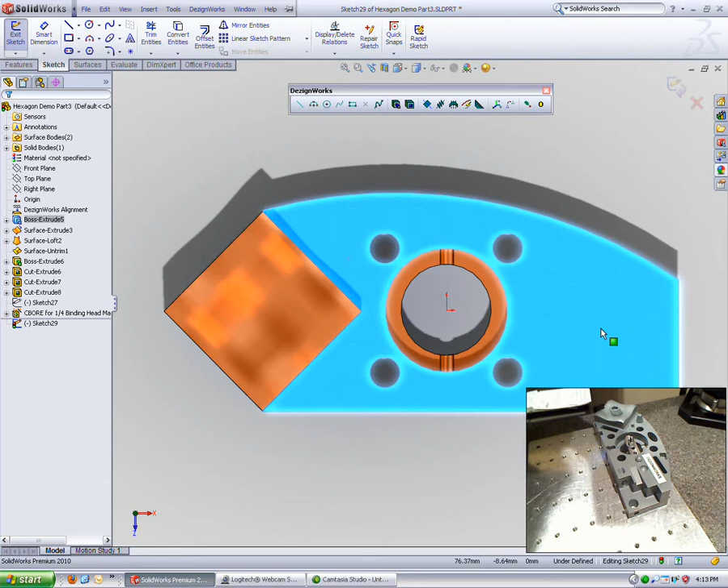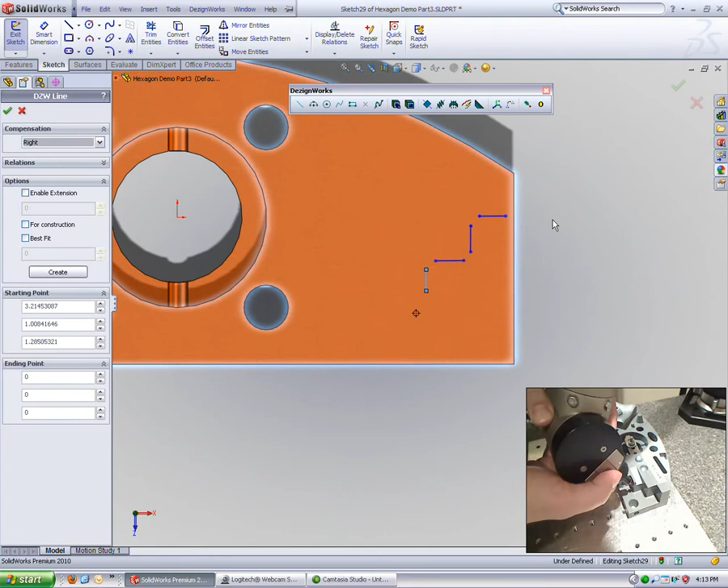The next set of geometry we're going to create is the steps along the right hand side. This is another example of doing 2D sketching with lines using the probe as input. The nice thing is we're doing automatic compensation, capturing a bunch of edges very quickly using the probe.

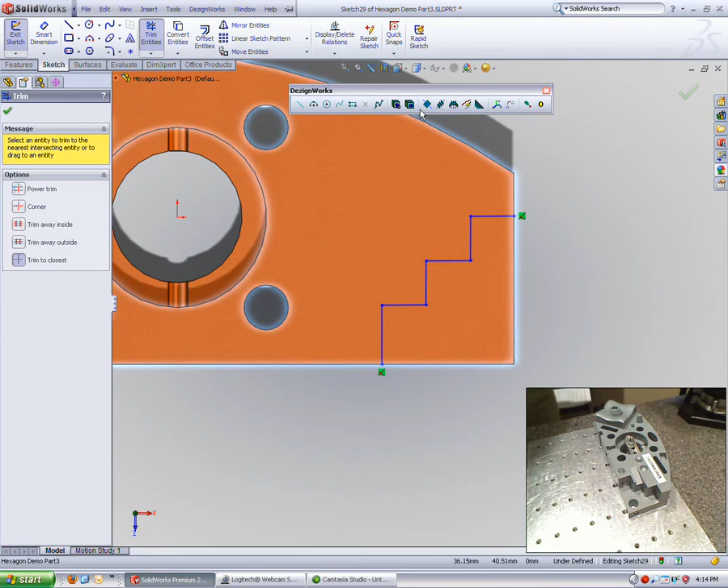Then we'll step back and use SolidWorks tools to trim up that geometry to create closed profiles. What's nice about this environment is you're always inside SolidWorks, because Dezignworks is a fully integrated gold solution product. We never have to leave the environment or do anything outside of SolidWorks. Again showing the level of integration, we're doing a cut using the contour select, which is right inside the Dezignworks cut tool off the Dezignworks toolbar.

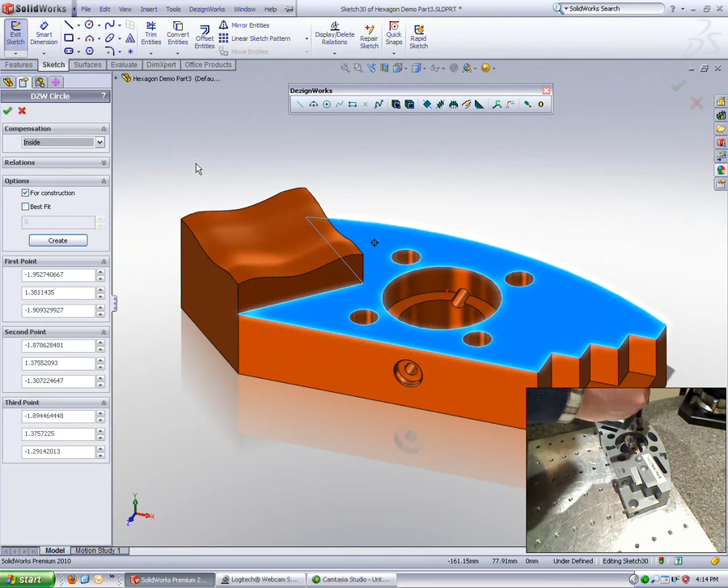Just like the locked surface where we capture a cross-section of information, here we're going to do a locked plane, used in a way that's a bit unique to this application. First we're going to get a location for the cone sticking up off the top of the surface, using construction since we just need the center point of that circle. We'll offset a plane up to that center point, and that plane becomes our locked plane that we'll take a cross-section through.

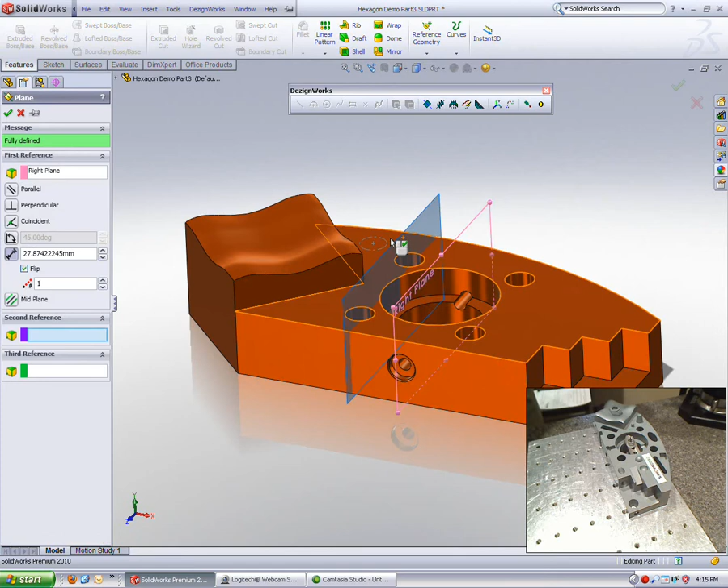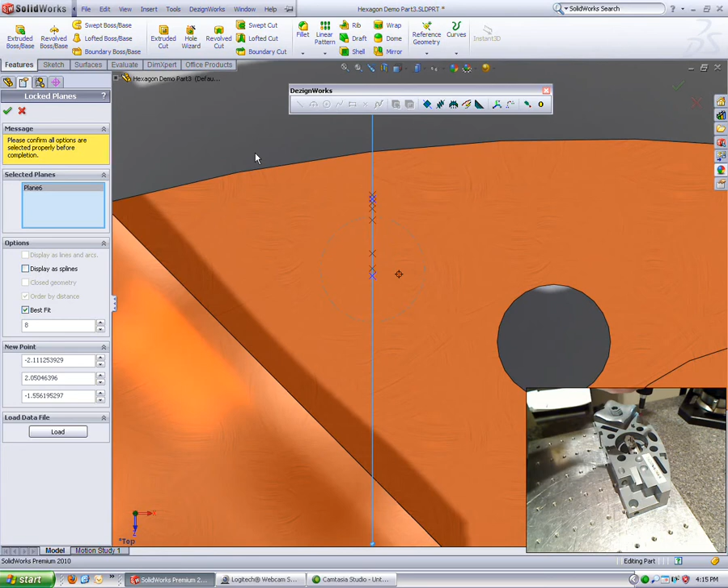Here we're using a standard SolidWorks function, the offset plane tool, picking a point for that plane to offset to. Now we'll pick our locked plane and change our orientation so you can actually see the probe move through that plane, and every time it does you'll see the point get picked up. We don't have the sound on the arm for this video, but normally every time the probe passes the plane you'd get an audible indication as well, so you know you've gone through the plane.

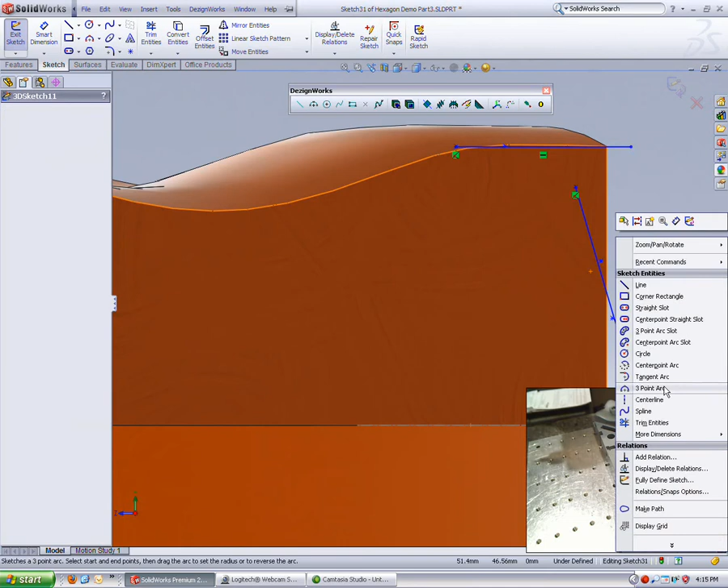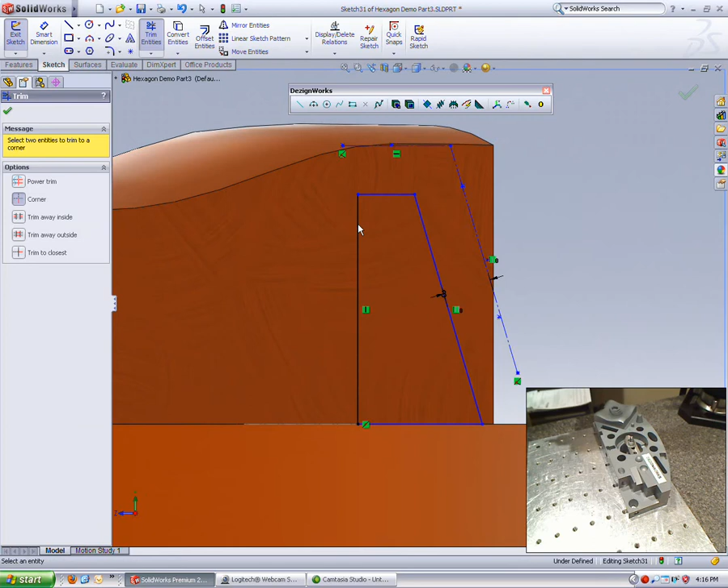Inside Dezignworks, sometimes you don't automatically comp, so here we're doing our comp for ourselves by offsetting this geometry right inside our sketch. We've offset half the diameter of our probe, again just drawing with standard SolidWorks tools. What we'll be able to do with this once we get the profile created is use our revolve tool and finish up this geometry fairly quickly.

The nice thing about this is we have a perfectly revolved shape that was based on the information we captured from our part.

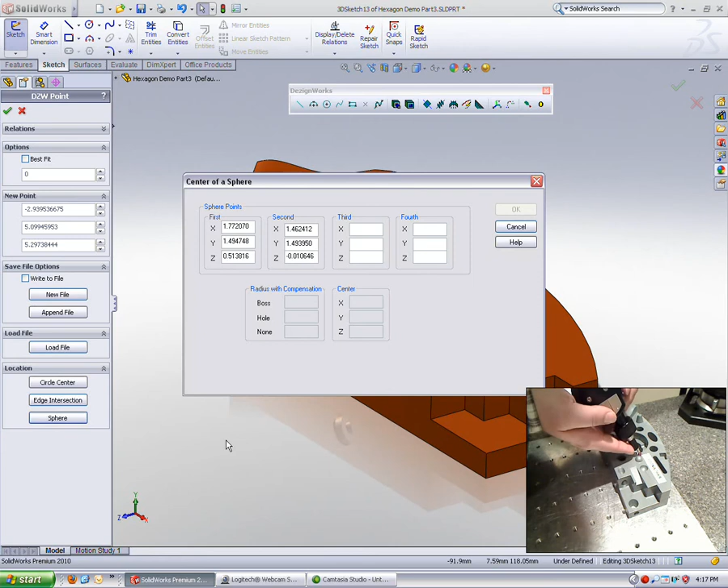A new tool inside Dezignworks 10 is the ability to get a center point of a sphere. Here we're going to do a 3D sketch with a point and use a new sphere command. We could also do circle center and edge intersection. So we're going to go around this half sphere and pick up a set of 4 points, which will give us the center point of the sphere that we'll use again in a plane offset to do another lock plane example.

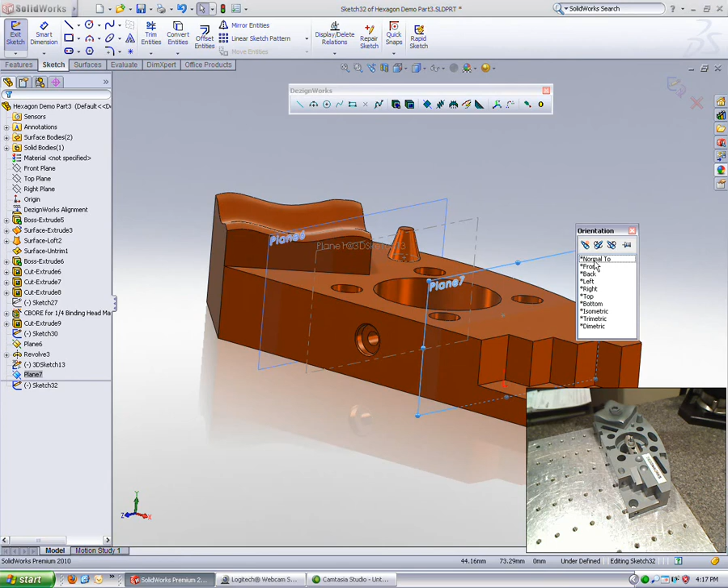Now the lock plane is used quite often to do complex surfaces and get multiple surface cross sections that we can use as loft sections to create complex geometry. You can see that in some of the other example parts on the Dezignworks YouTube channel as well.

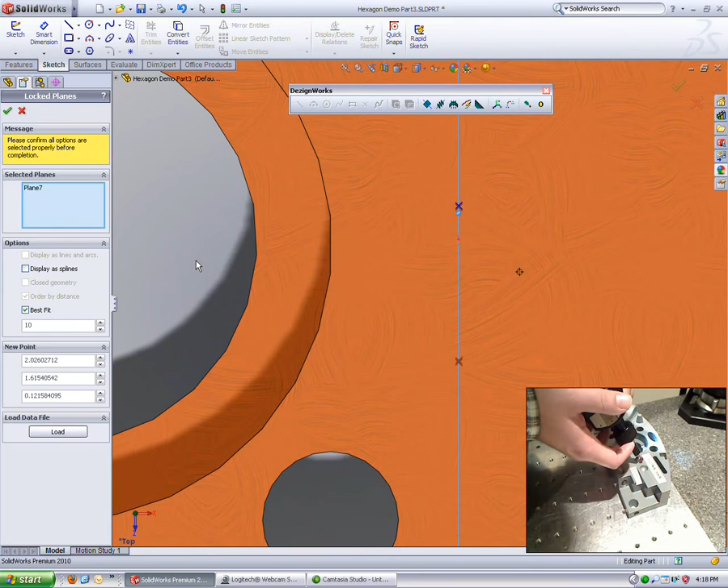Now, this particular sphere we know is a half circle, so we're just going to take some points in our lock plane that are along the bottom edges and also across the top center, because we know we're going to draw a circle or an arc, actually a center point arc, to give us our cross section that we'll again use to revolve.

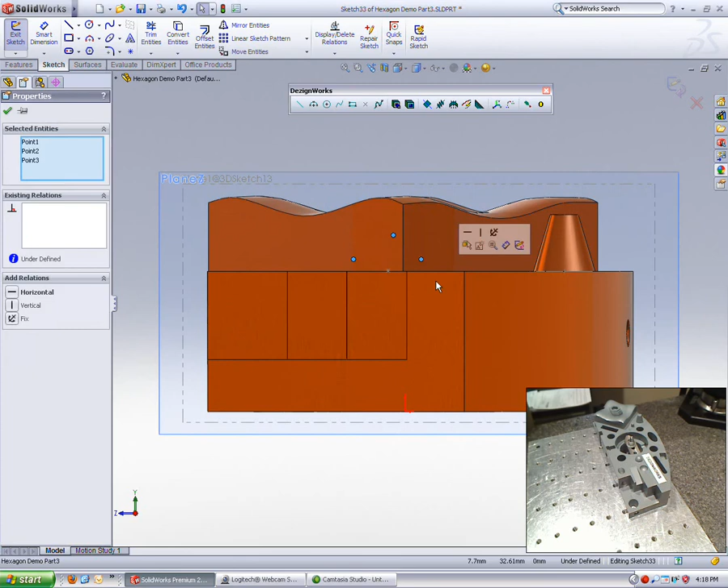Again, the benefit here is everything's native SolidWorks data, so we know these points can be referenced to create relationships when we build this arc geometry, and we can edit the sketch that was just created by that lock plane to put in SolidWorks geometry.

Again, we may want to offset the arcs that are going to be created so we get an accurate offset from our ball size. So here we're going to use a standard center point arc and create some relationships to those points, then go ahead and close off that profile once we offset the geometry the size of the probe.

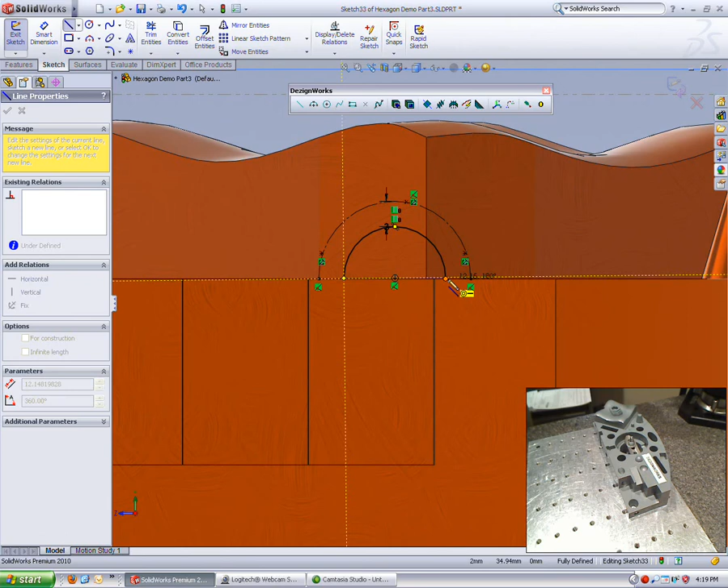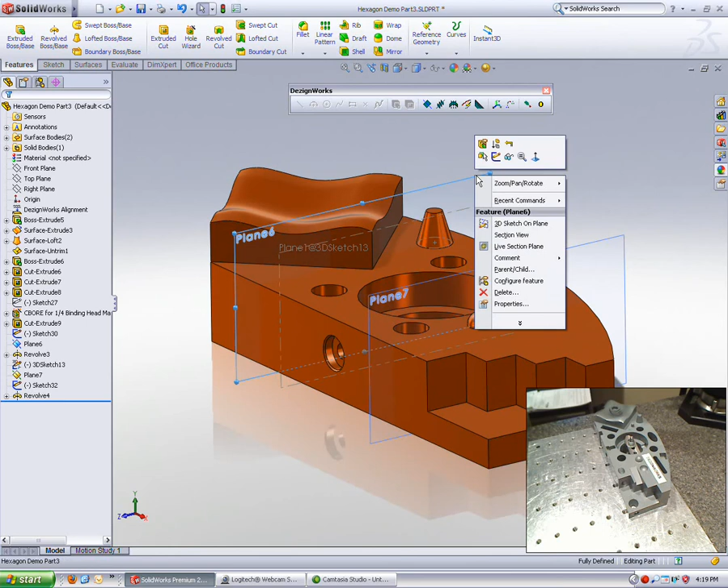In Dezignworks, you're always working in conjunction with your SolidWorks. So the knowledge you have of your SolidWorks tools is going to make the use of Dezignworks very easy for you as you go through and create your geometry, because you're modeling using standard SolidWorks tools and just taking the input from the arm, using that input along with Dezignworks tools to get the geometry you need.

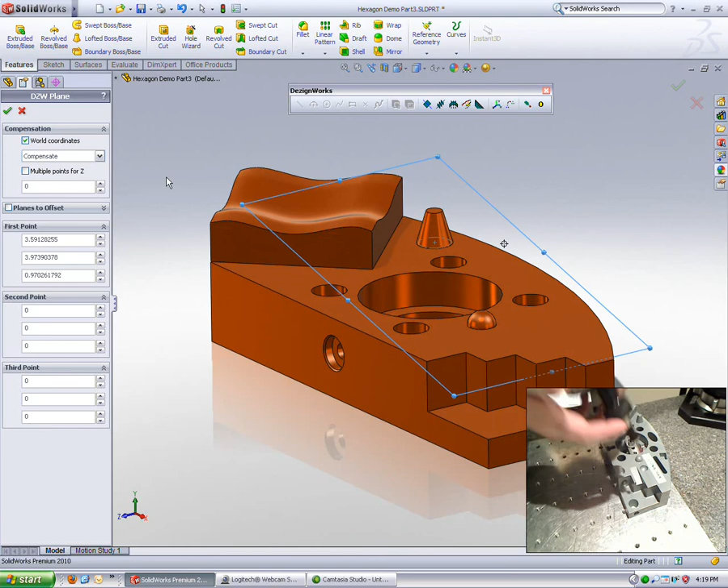The last thing we're going to do is create this angled cut, and we'll do that by creating a Dezignworks plane. We can create a plane inside SolidWorks using Dezignworks tools, which allows us to take 3 points on the surface and get that angled surface.

We know it's flat, and we know it's oriented properly because we've created it with Dezignworks. It would be very difficult to get that angled surface positioned somewhere in space without the use of the Dezignworks tool as we're reverse engineering this particular part.

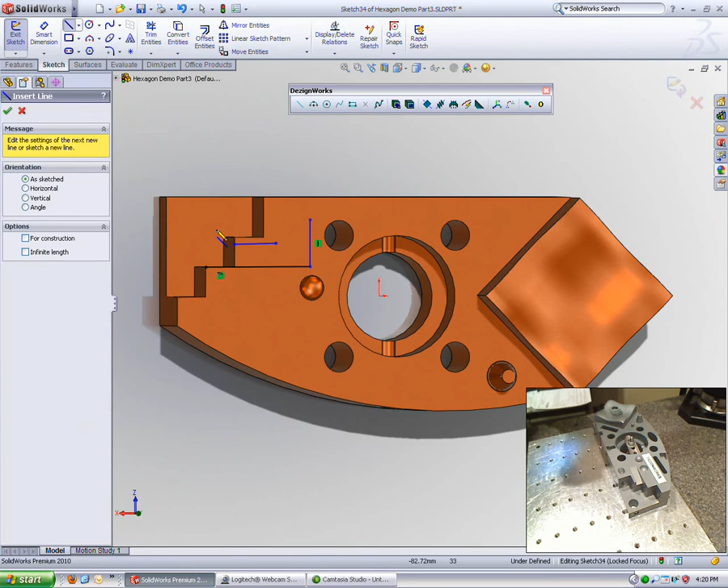Now we're going to use existing edge geometry and the creation of a line using Dezignworks, and we'll draw in some extra geometry and trim it up so we can remove this material away from the part.

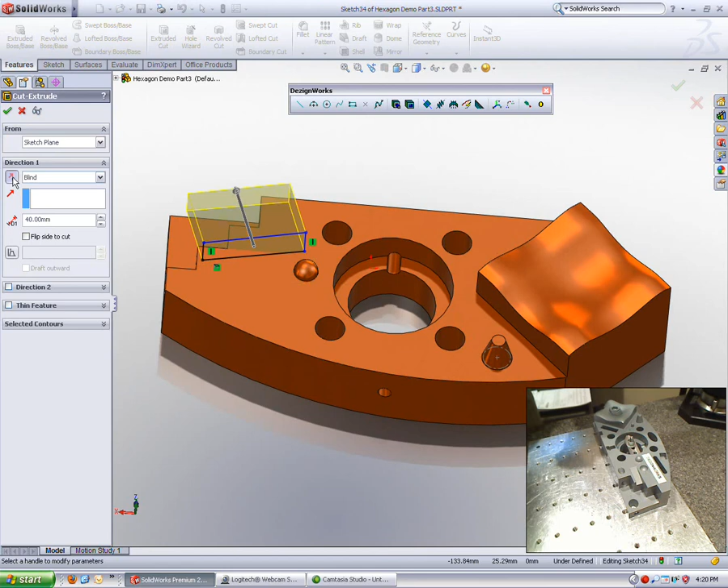Here we'll finish up this part with a few more commands. What you've seen in this video is the ability to reverse engineer entirely inside SolidWorks, leveraging all of its features and the features of Dezignworks. This allows you to reverse engineer in a much faster and easier way.